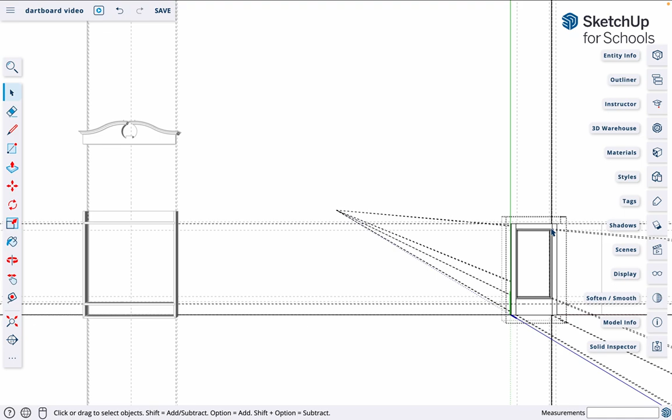At the end of the last video, I told you to make the door a group by selecting the four components and grouping them together. That makes it easy to move across. If you haven't done that, you'll need to. So we've got the door as a group, and we're going to move it over and place it on top of the cabinet.

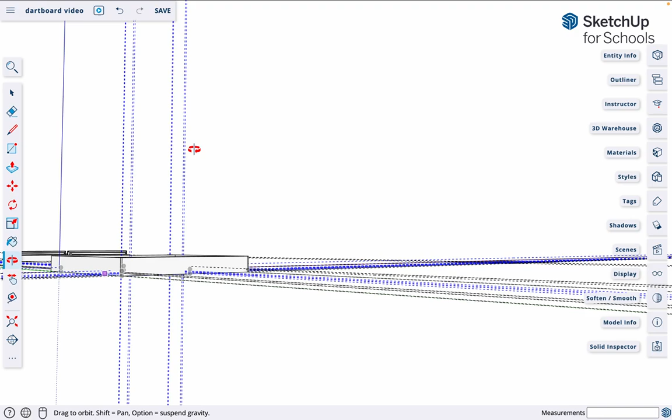Because of the way we're viewing that, you'll notice the door is actually aligned with the back. We need to raise that up, so bring it up to the top there. I'm going to zoom in and place that corner on the corner of the cabinet.

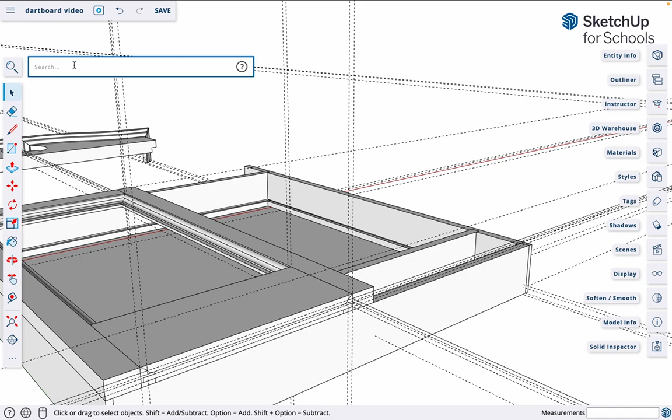Now these guides are all on the road at the moment, so I might get rid of those. If we click here and type in delete guides, they're gone.

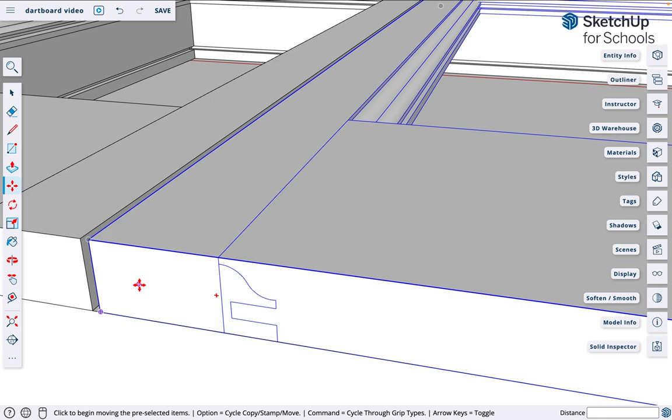Now I'm going to copy this across to that side there. M is for move copy, click, option for copy, move it across and paste it down. Now, interesting, we've got a gap in here, and that gap is 2 millimeters. So I miscalculated somewhere along the line, made the doors a bit short. Not uncommon. So what are we going to do about that?

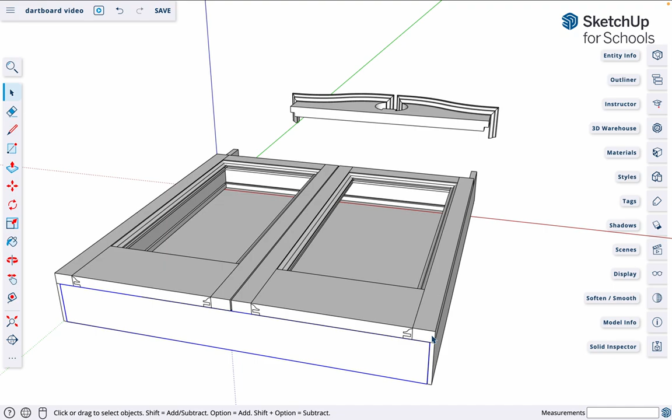Well, there's two things we can do. We could split the difference and have a half mil gap on each side and a 1 mil gap in the middle, or we could make the components a little bit wider—make them half a mil wider and move them half a mil.

Let's have a look at the top. I've also noticed at the top they're a bit short, so we need to do some modifications here. We're going to make the doors fit.

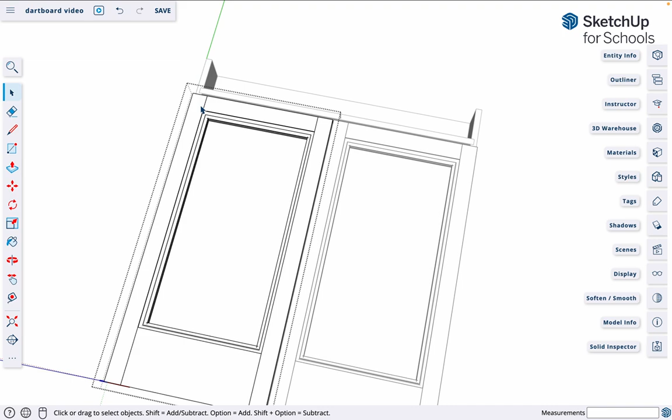First of all, the doors have been grouped together. If we want to modify them, we have to ungroup them, or open them up in edit mode individually. So I've opened up the stiles, and the stiles need to be longer.

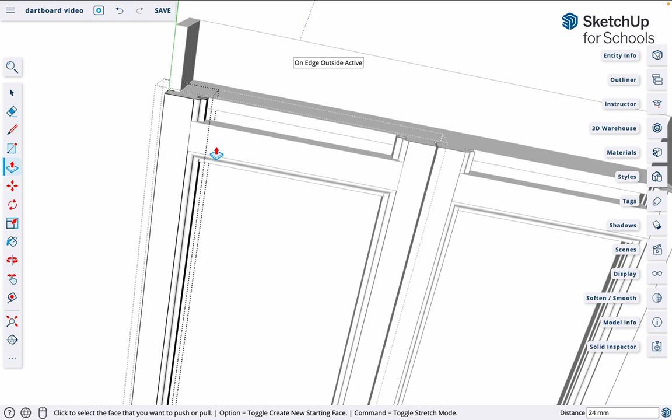So I'm going to use the push-pull tool on the end here and make the stiles match to the top of the cabinet. I think you'll notice they both grew because they're all connected together, being components. We're now going to move this component up and align it to the top.

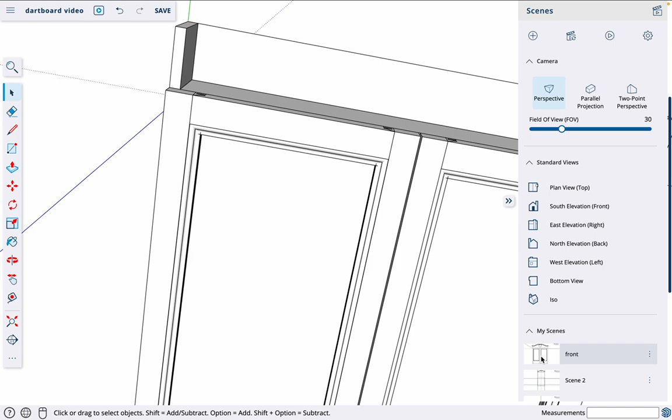And they're grouped together, so they won't move properly—so unclick that. Go back to the front view. Now, how does that look? Much better. Matches all up.

Now, there's still that little bit of a gap in the middle between these two. I think rather than leave it, we'll match it—we'll make these stiles a little bit wider.

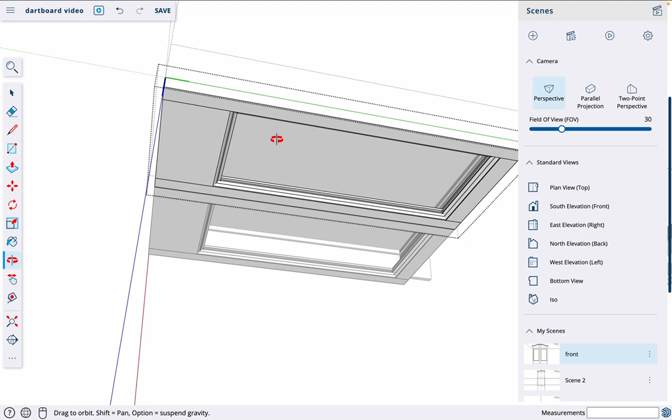So double click on the stiles, move around to the back of it, and we're going to make this stile—push it out. Actually, going to double click again, P for push pull, type in 0.5 mil. So each stile is now 0.5 mil wider.

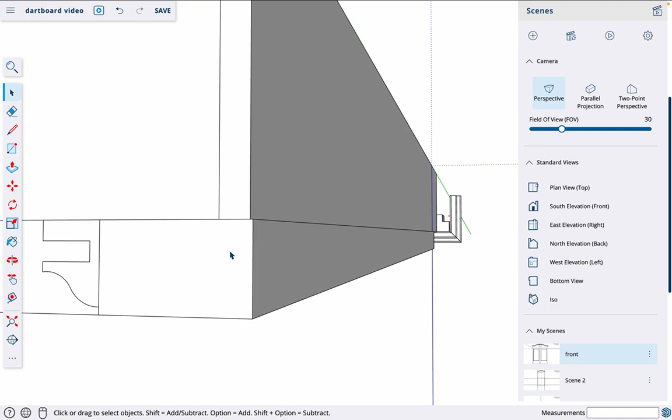We'll need to now relocate the corner back in and align it. That means now that we should have no gap in between. In fact, I think we've got—I've got to move the other side, don't I?

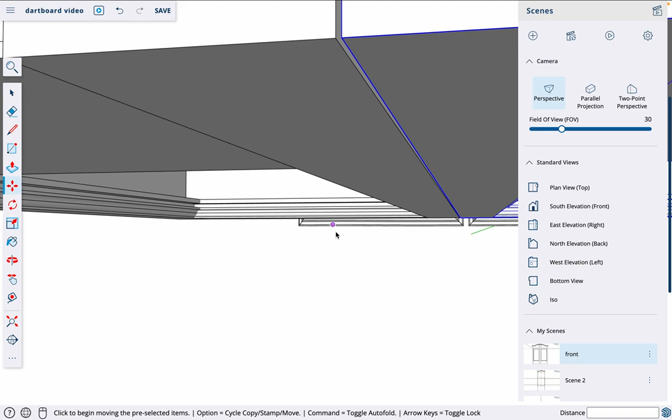Yep, so we're going to move this one—move copy, click, drag—back to front view. No gap, doors the right length, everything's fine. One of the things you have to do sometimes when you're designing a cabinet from scratch.

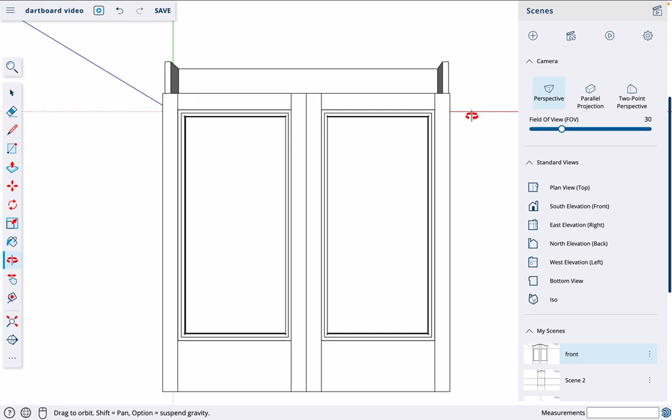Now, next job is to add the crown moulding pelmet at the top. So I'm going to select it. Oops, it's red—why is it red? It's red because before I gave it to you, I locked it. To unlock it, you have to go into Entity Info and click Unlock. This will allow you to move it now.

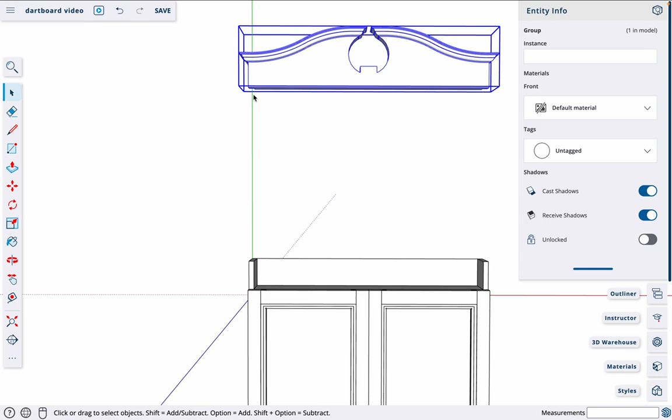So we're going to move the bottom corner and match it up with this corner down here. M for move copy—it's the intersection right in there. So I'm going to get right in that corner, select on, and then place that on top of the cabinet.

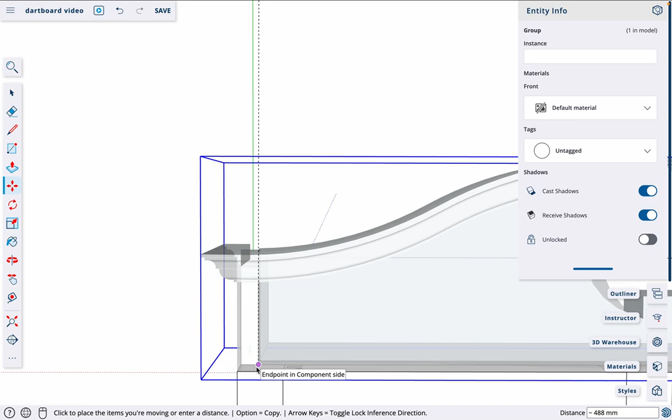Right there. Matches the corners perfectly.

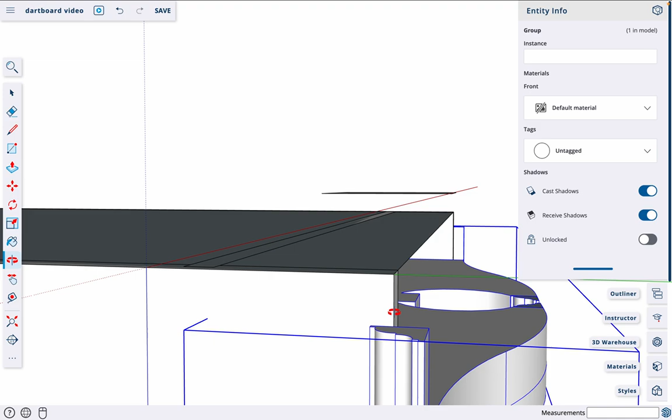Okay, let's have a look at the back. Oh, got a problem. You'll notice I obviously didn't make that long enough—it doesn't match the end of the cabinet. That's an easy fix, just use the push-pull tool.

Open in edit mode, push-pull. And then on the other side, push-pull.

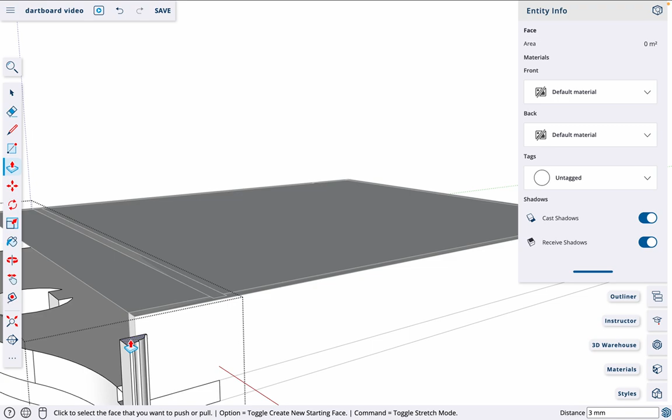Match to the sides. Also noticed, the sides don't go all the way up—they're a little bit short. All right, that's easy fixed: double click, edit mode, push-pull, match it to the end. And because they're components, they now are the same on the other side.

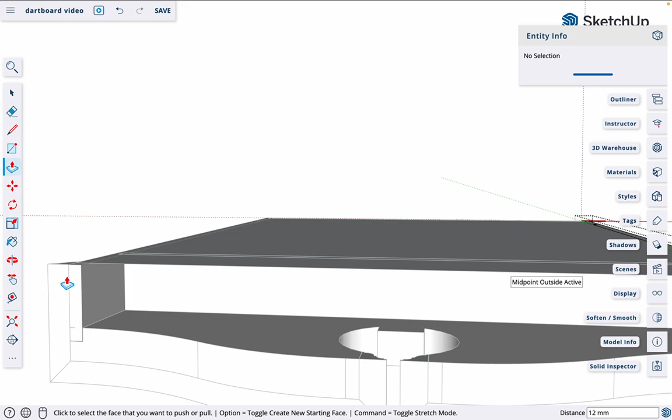So those small adjustments are so that the cabinet is all secured and matching up. Sometimes when you're trying to design something from scratch and predicting all those, you can get your maths wrong, which is what I did today.

Anyway, we've now got a fully assembled cabinet. The only thing missing is the back panel and the panels that go in the doors, and that will be for another video. I'm just going to go through the displays now.

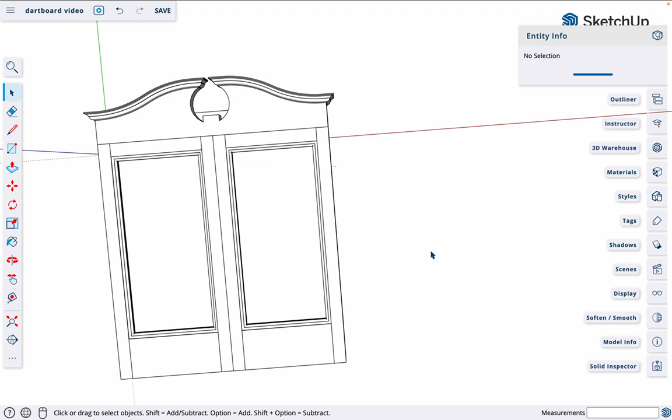You can see what it looks like. Front view. Side view. Oh no, that's Scene 2. Side view.

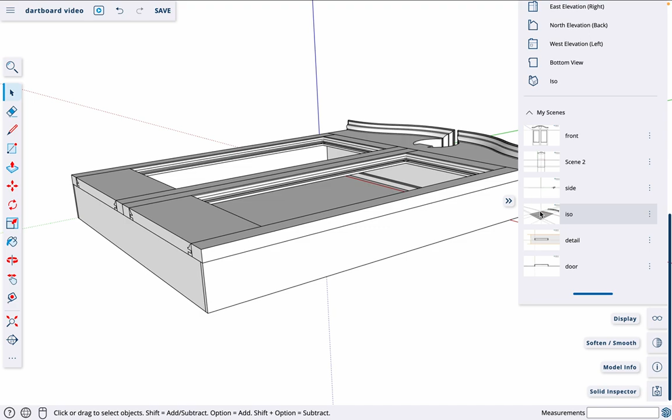Isometric view—don't like that one very well. I think I might change that. I'll close that there, I'm going to make it more upright. That's better. Go back to that scene there and update it.

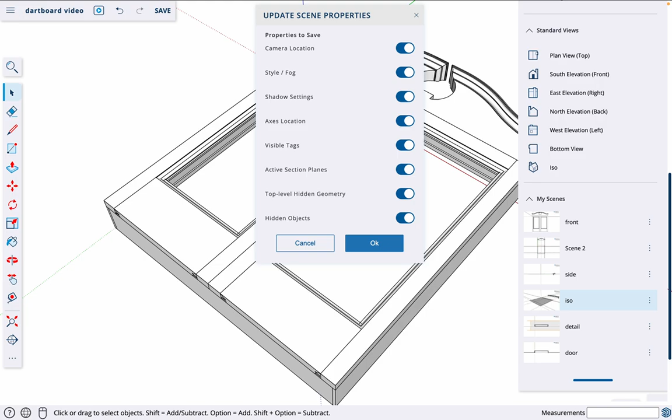Then we've got the detailed view. There's no details there, but in another video I'm going to show you how to add a sectional view so you can see inside the cabinet.

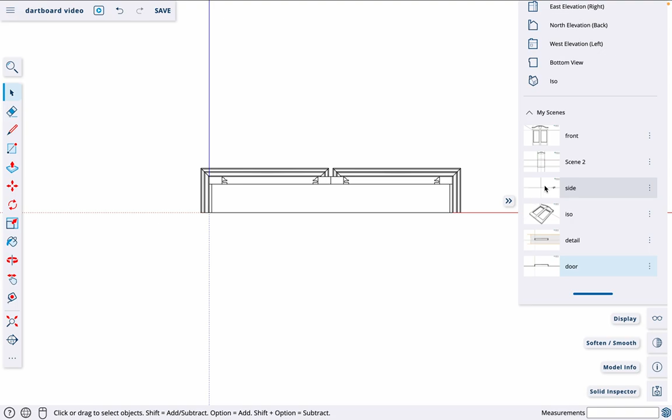And finally, the doors—don't need the doors anymore because we don't have a door thing. So side, let's go back to front and we'll finish our video there.